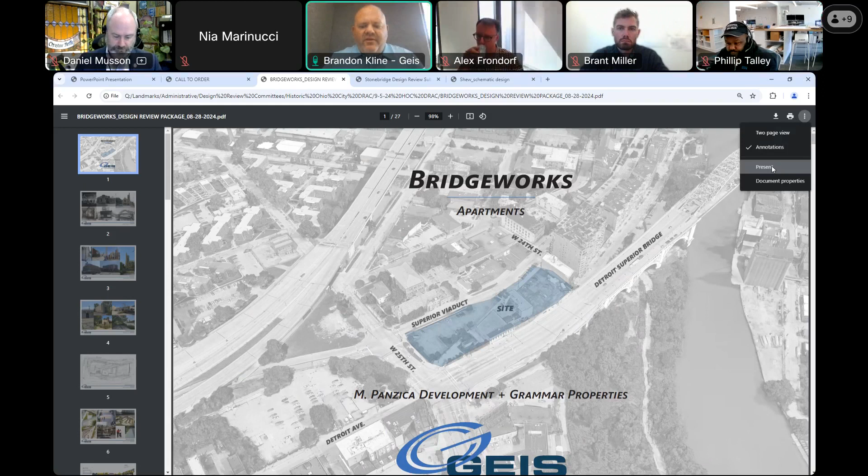Before getting into the presentation, I want to thank the commission for their flexibility last round, allowing us to proceed and get feedback from the Landmarks Commission. The project was well received, with very good comments and feedback, some of which was in line with comments from this commission, allowing us to hone in and make modifications to come back for a final request today. So thank you for that.

The project is located at the corner of Superior Viaduct, West 25th, and the Detroit Superior Bridge.

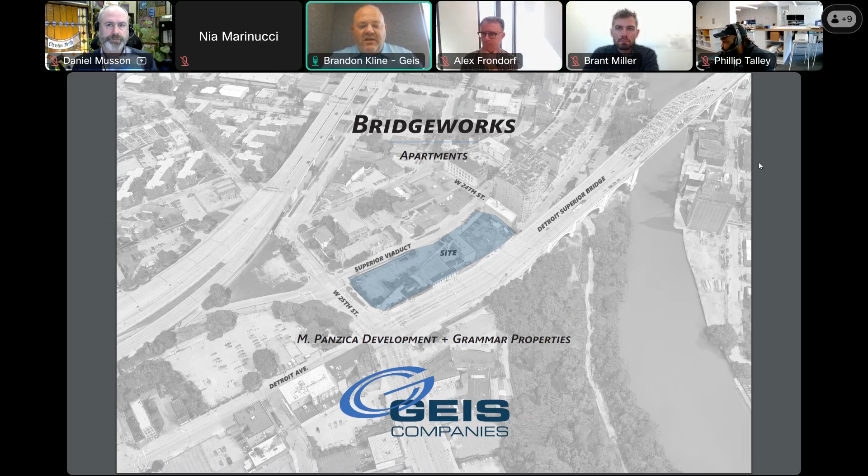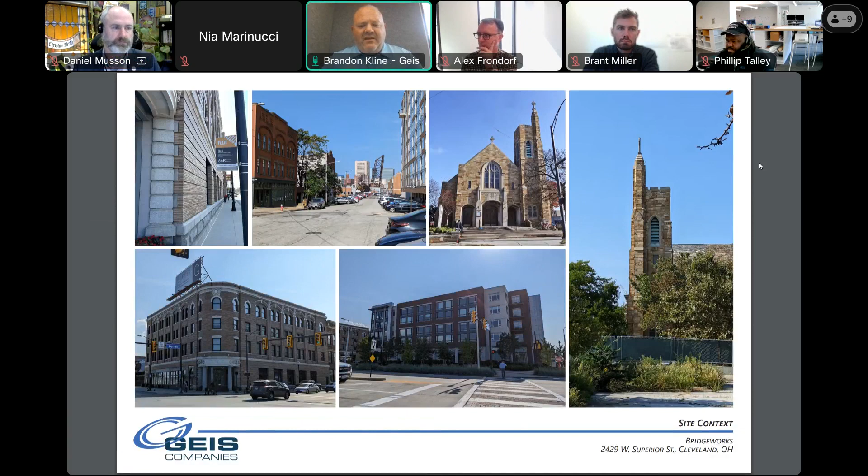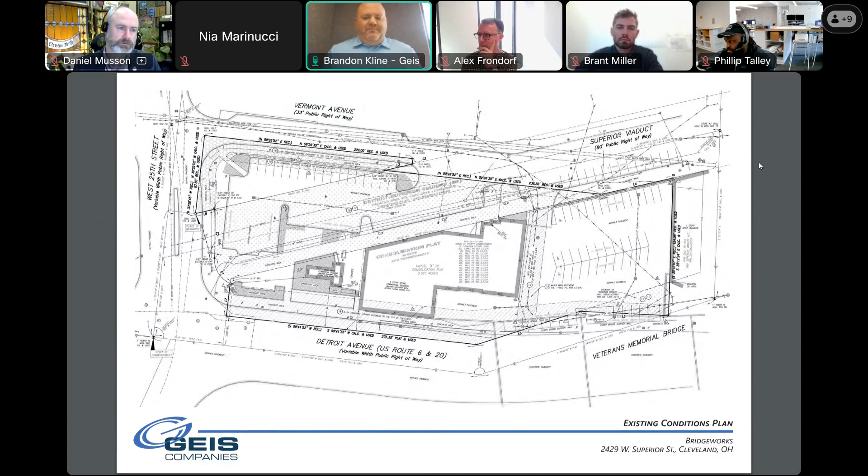From a general site plan perspective, nothing really changed from the last time we presented, other than some refinement which I'll go through in the renderings. We were able to consolidate and limit vehicle access under the bridge, allowing for a more pedestrian-friendly experience on the backside area as it connects to the underbridge into Irishtown Bend Park, when that gets fully done and reconnected, with some updates to the landscape plan.

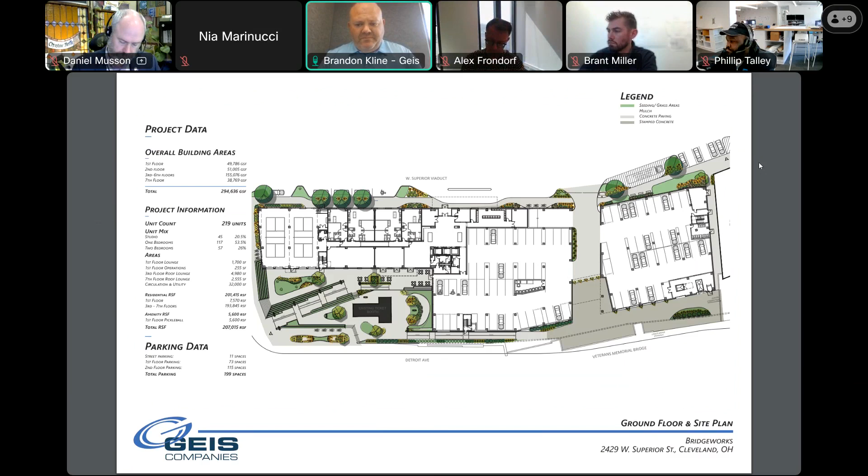This shows general circulation from pedestrian, vehicular, public, and service, to give you an idea of how people access the site and building, and circulate through it. The intention is to allow the pedestrian to cut through that underpass area to access the opportunity for some special seasonal events.

There's been a lot of discussion since the underbridge opening a couple of months ago about the opportunity, given its success, to treat this almost like Dumbo in New York City, where there's a connection under a bridge with seasonal exhibits - whether a farmer's market, retail, small boutique, pop-up event, or sales - repurposing the garage for that while we relocate some parking for the building on a temporary basis to accommodate it.

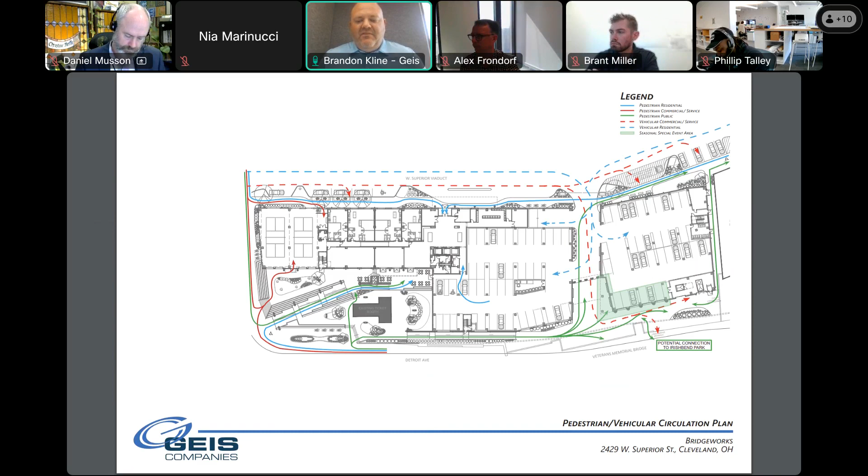For site lighting, the one aspect that changed is we added some linear wall washing at that intersection and connection that slices through the property to the underbridge, to create a warm glow and accentuate the repurposed stone. We'll show you a detail slide of what that looks like shortly.

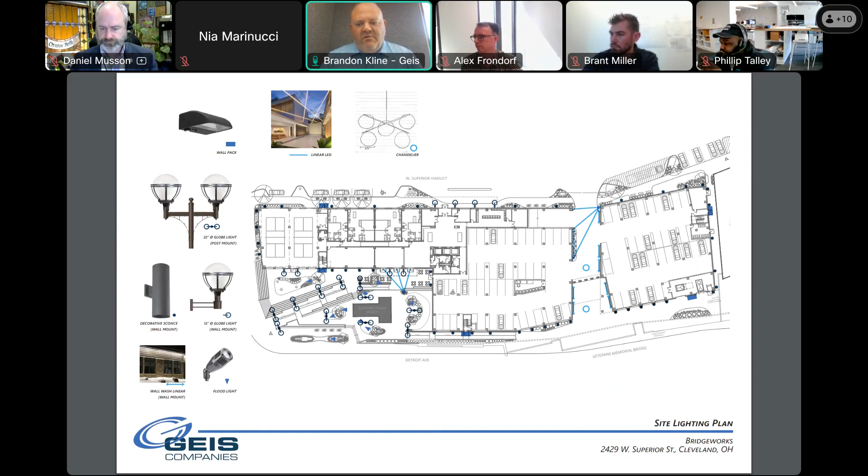It's a 7-story building with 1.5 floors of parking. The rest of the building would be multifamily with some pickleball courts and other amenities, along with a cafe.

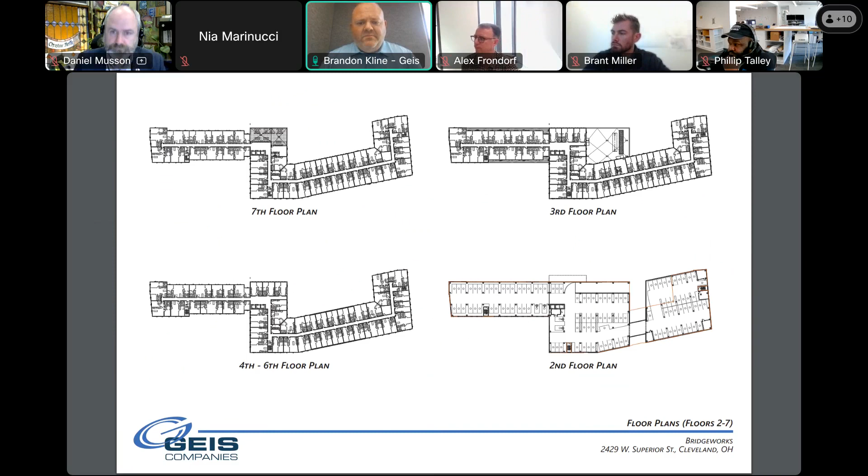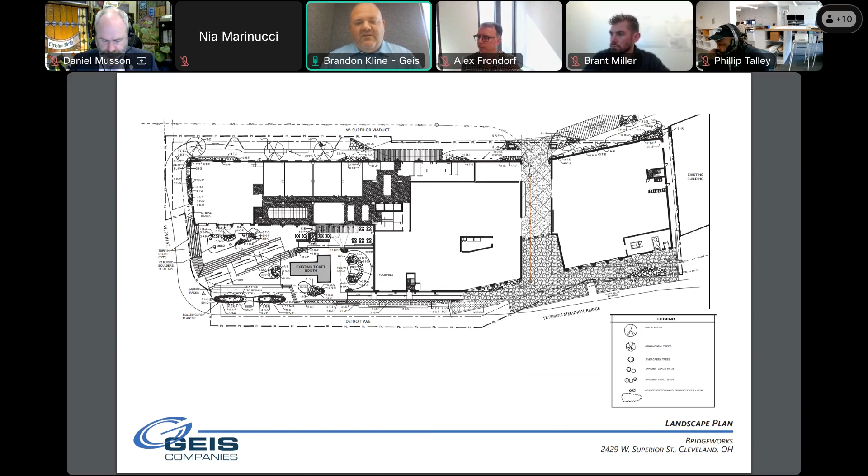Native plantings and low maintenance landscaping.

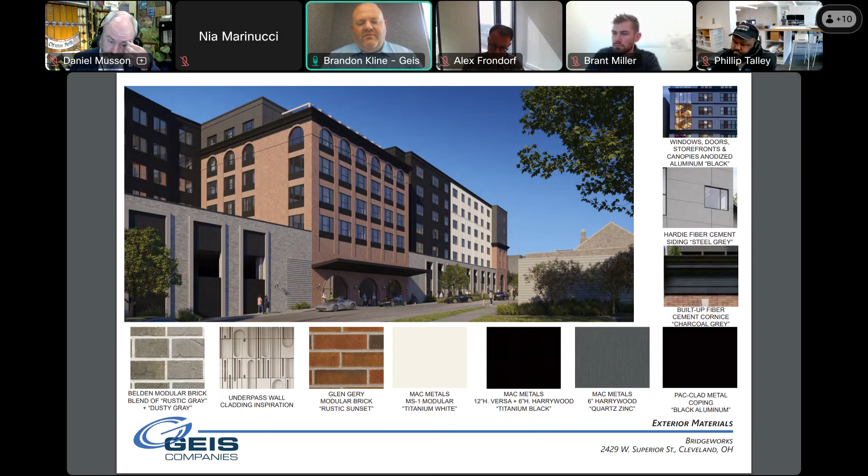The materiality of the project has remained relatively similar. I want to emphasize that the Mac Metals MS1 modular titanium white was presented as a white color, but the real color has a slight cream to it, so it's a slightly off-white white. Outside of that, the materiality of the building remained the same - just the orientation and some detailing has been modified, including increasing some of the brick elements and floor lines.

From an elevation perspective, at the corners of the building we raised the brick floor line and made it consistent at the ends. The idea behind the design is to create a hierarchy of the main mass on the main frontage of the building, connecting through to the backside as a break point - breaking up and varying the facade and massing feel, and creating a tiered approach at the bookends with a lowered cornice height with brick. We also detailed the bookend with a radiused window similar to what was in the middle section that everyone really seemed to like at both commission and landmarks.

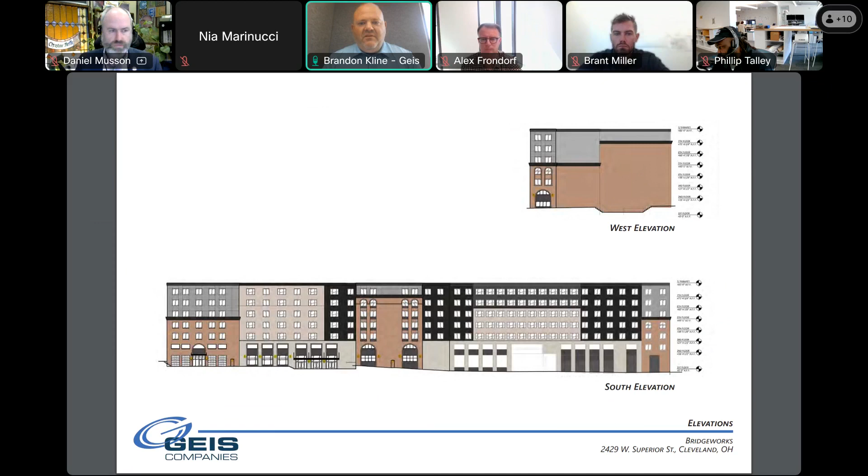This is the plaza side. Aligning on the south elevation would be the bridge section. We also limited the amount of that cream white materiality, and simplified some of the detailing so that it wasn't as broken up and out of place as some of the comments we received at the previous commission.

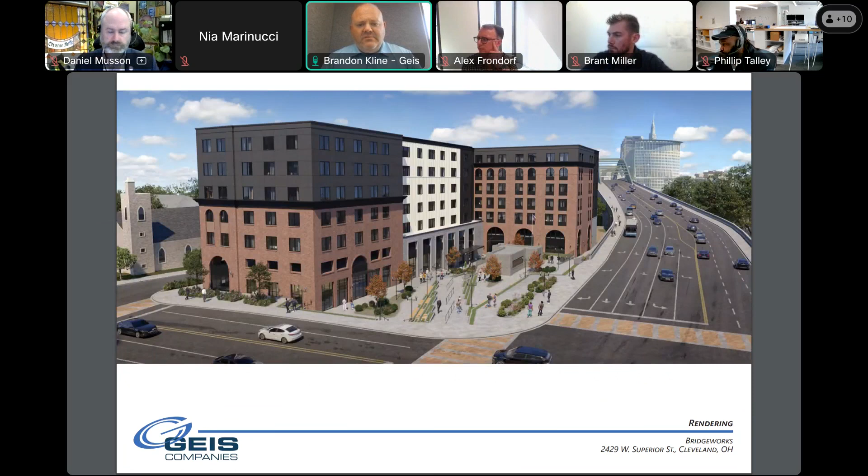Here's a look from Superior Viaduct, kind of an aerial bird's eye view. You can see the roof terrace on the 7th floor of the middle section. We've also added a roof terrace on the 3rd floor of that inset area for outdoor amenity space, more of an active outdoor roof terrace. Again, we limited some of the white to try to break up the building a bit more.

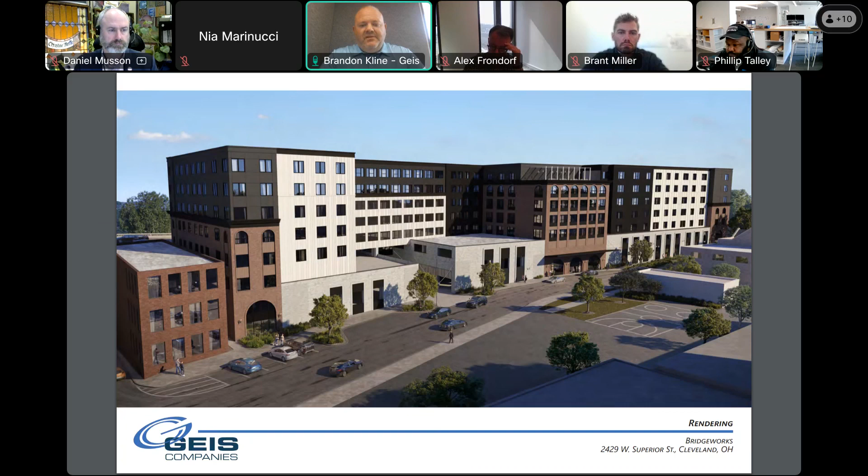A look down Superior Viaduct.

The view back up, looking at the main entrance to the building and up towards St. Malachi and West 25th.

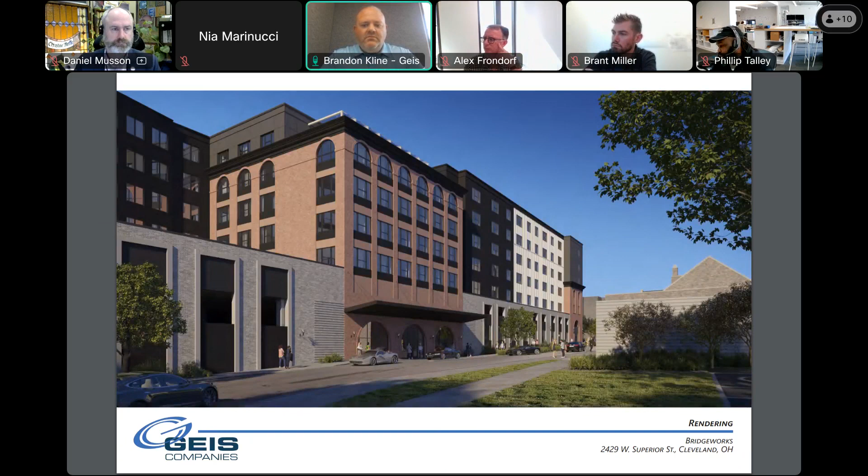A detailed, enlarged view of the patio, as you come down the rampway to the main inset building entrance off of West 25th in that plaza.

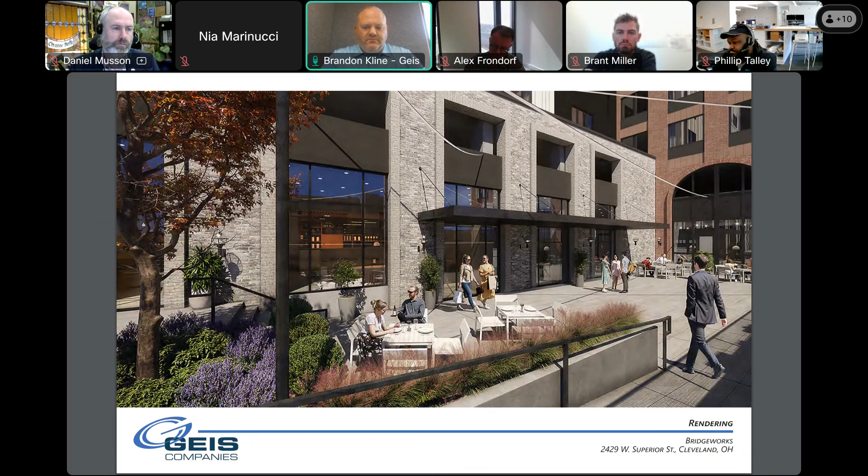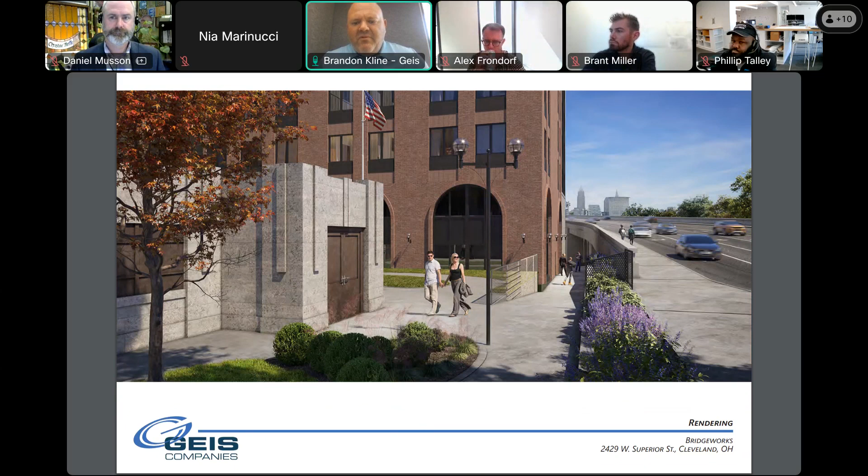A view down just to the right of the ticket booth, as that walkway connects you down to the underpass and underbridge area and connection. You can see some of the archways continuing on down, along with the brickwork and brick detailing that occurs.

Here's a view down from Superior Viaduct looking at the underbridge connection and access point. You can see the detailing of the wall paneling on the left—we're going to flank that paneling with repurposed masonry coming off the existing buildings, details of which you'll see shortly. It will be a nice linear lining of old and new aligning as a pedestrian accesses that walkway.

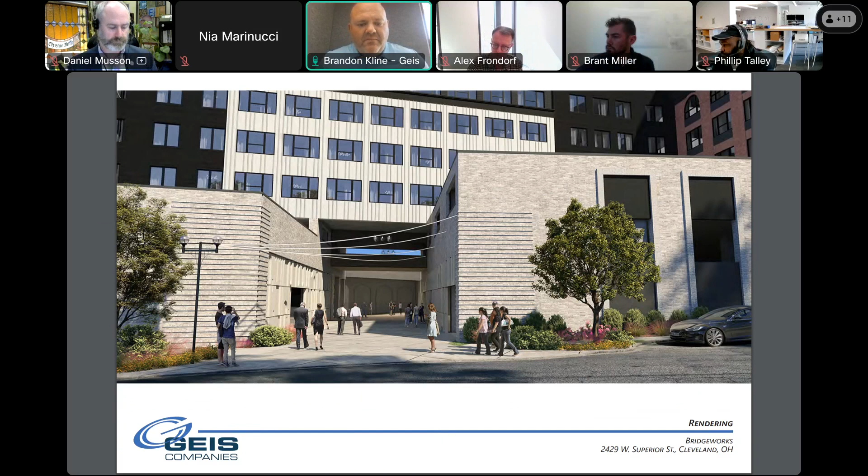Here's a look at what this will look like as a farmer's market or weekend special event opportunity. Right next to the opening of the underbridge, you can see the detailing of those wall panels. They'll have wall-washing light to create a glow, lighting this area and making it an inviting space.

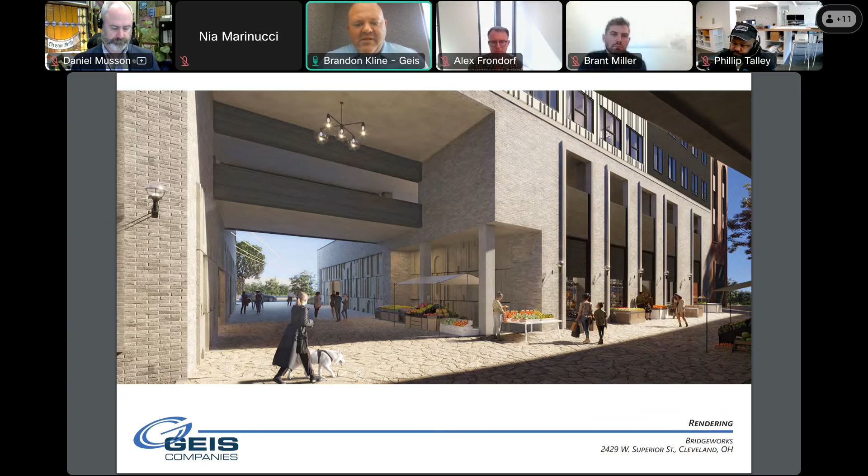Here's the imagery of the stone we'll be repurposing and salvaging when we demo the existing county facility building, then repurposing it into the new building. The next slide shows the location and idea of the repurposing.

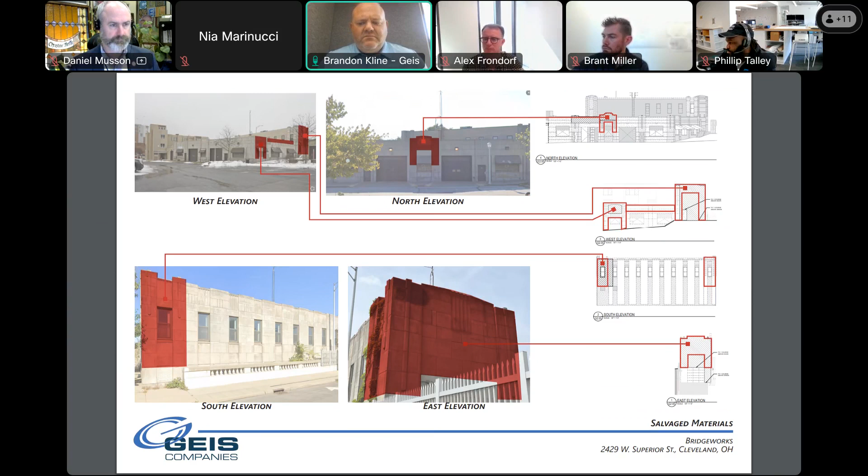We're recreating those Art Deco style piers that occur on the main building, utilizing that architectural wall paneling as a break. One comment we'd like to adjust as we present is to fill the space between the columns and the Art Deco wall paneling more, so it aligns at the same line as the garage entry for more consistency. This was the idea of the salvaged stone and how the GFRC molded Art Deco panels will work together.

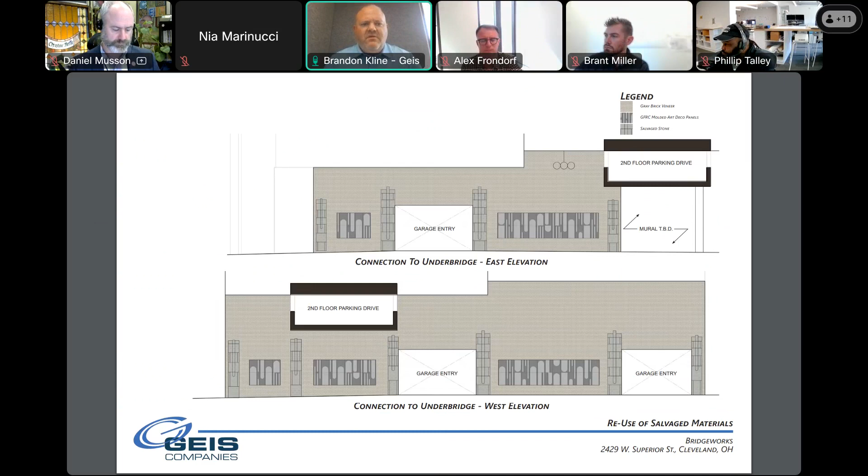Thanks for the presentation. Real quick, Dan, were you ever able to find out any information about the Stonebridge right now? Oh, hey, there we go.

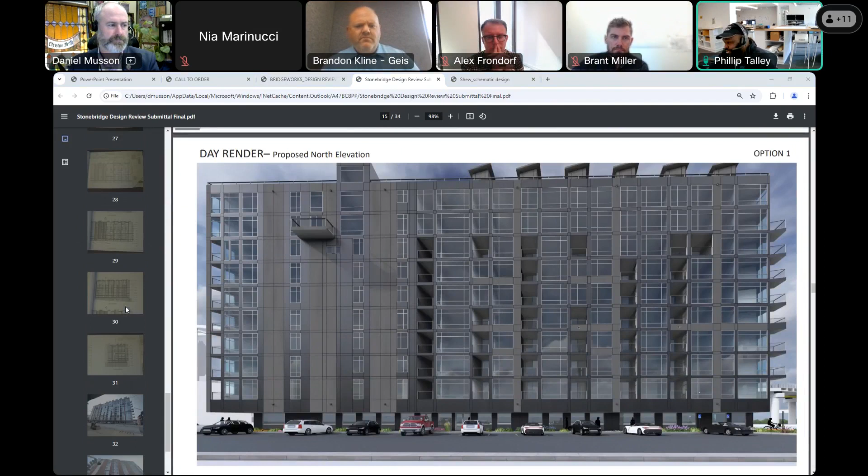Brandon, I don't know if you guys were aware that the Stonebridge right up the street, two buildings over, is being recladded. They're taking off all the brick and doing a metal panel. So this is what it's sitting in relation to. I don't know a ton about the project itself, but this is what your building was kind of up against, minus the little building in between.

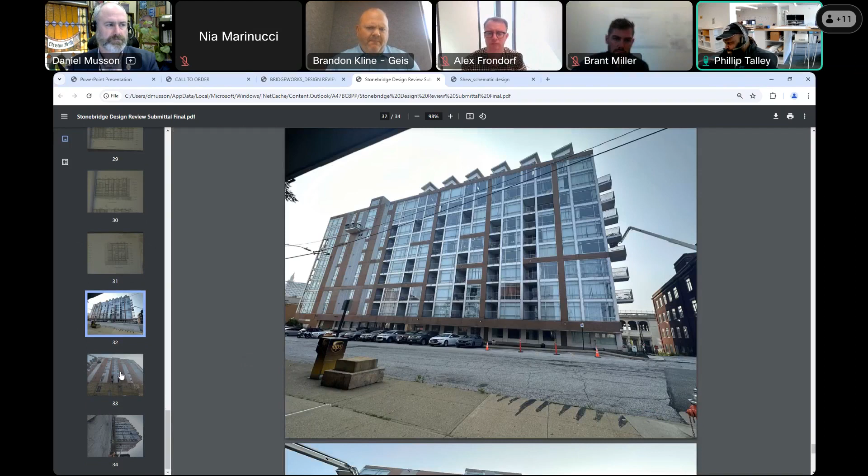Had you seen these renderings, or had you guys seen these renderings? I haven't seen the new ones. I'm very familiar with the existing conditions and the issues and deterioration of that facade.

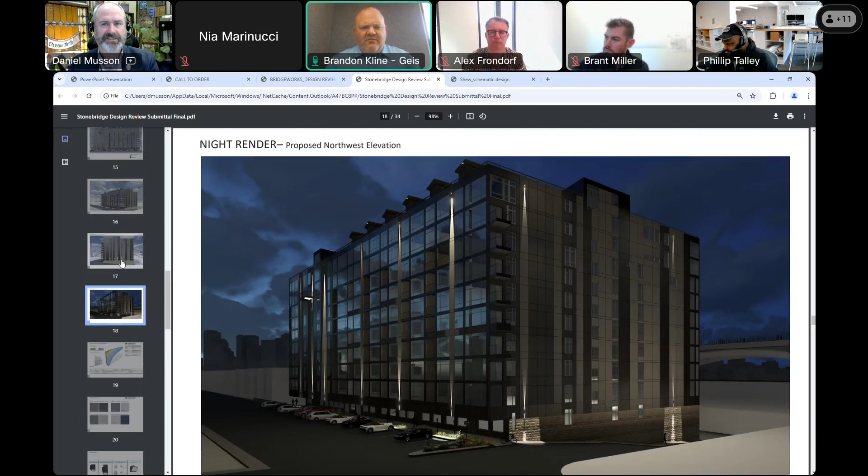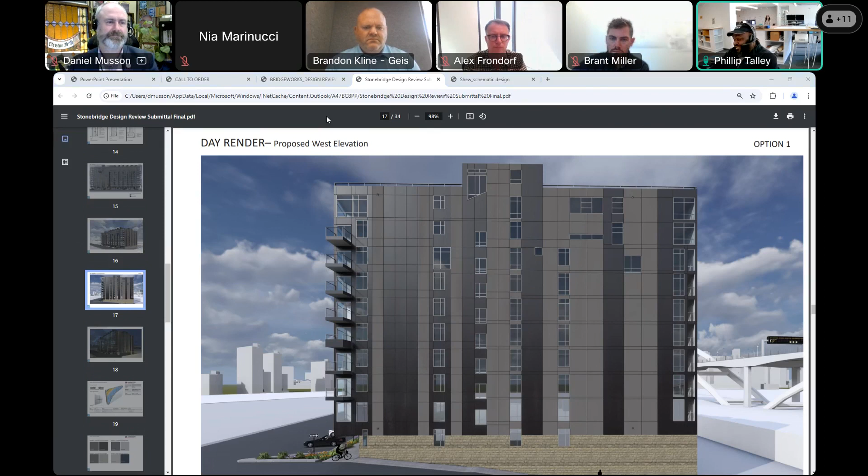Okay, yeah, this is helpful. It's unfortunate that we can't see them in the same rendering, but I do appreciate this, Dan. This was very helpful. It's going to be a dark building.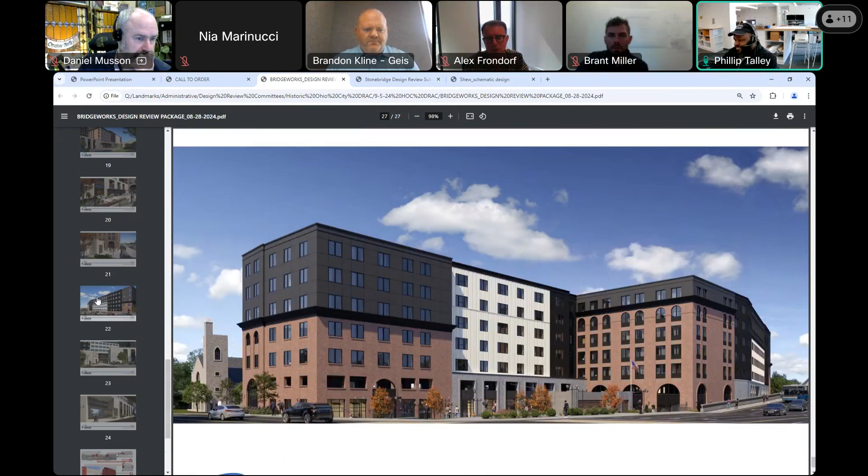So can we go back to the renderings? Yeah, this one, and actually, I think I want to go to the view along Detroit Superior Bridge. Yeah, that guy. Okay, I mean, I guess they are speaking a similar language as far as the use of dark panels.

But yeah, I will open it up to the committee first, though. If anyone has any questions or if you want to get anything out there, I will allow the committee to go first. Phil, could we ask Dan

to receive the feedback that Landmarks provided? Oh, yes, Landmarks feedback. Yes, so generally, Mr. Kline mentioned they were, I'd say overall, generally supportive.

There's some recommendations that the applicant look to consider the dark and light composition, architectural expression, and urban design, the scaling of the openings at pedestrian level, and the uses to activate the spaces. There was some comments that the southern elevation could have more depth or interest with materials, colors, contrasts, and articulation.

So that's the elevation that's up now. Also, additional suggestions of articulation along the Detroit Superior edge to make it more like the north elevation or the Superior Viaduct side.

I did share the Design Review Advisory Committee comments with them, of which, generally the commission was agreeable to, and again, reiterated the kind of studying the articulation of the south elevation.

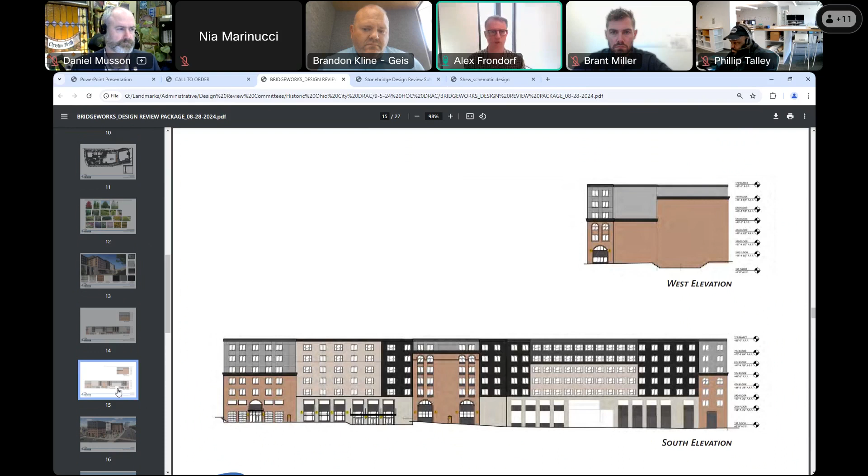No. That one there. I just want to make sure I understand what I'm looking at there. That west elevation, that large expanse of brick. I didn't see a 3D rendering of that, so I want to make sure I understand what it is that that is facing. Is that facing the adjacent building?

Yeah, you're not going to see this. There's a 3-story building flanking it and blocking it out. There is a rendering that you kind of look at that view, and again, you barely see that facade because of the adjacent buildings that block it.

Okay, understood. That was my assumption. I just want to verify.

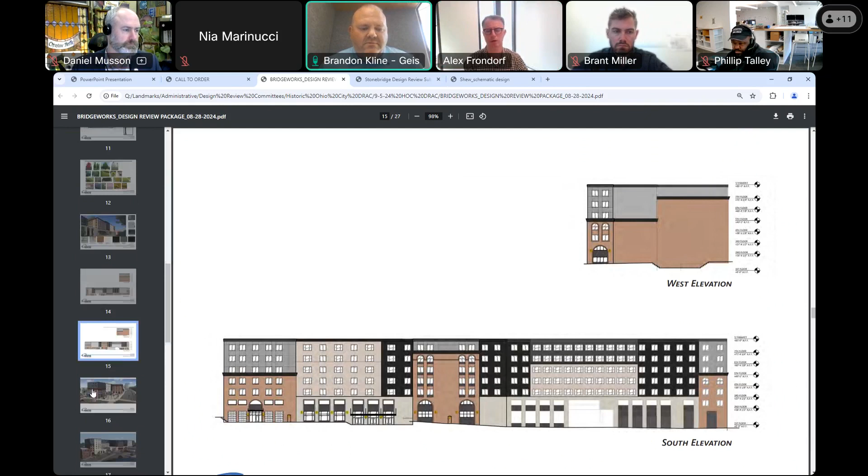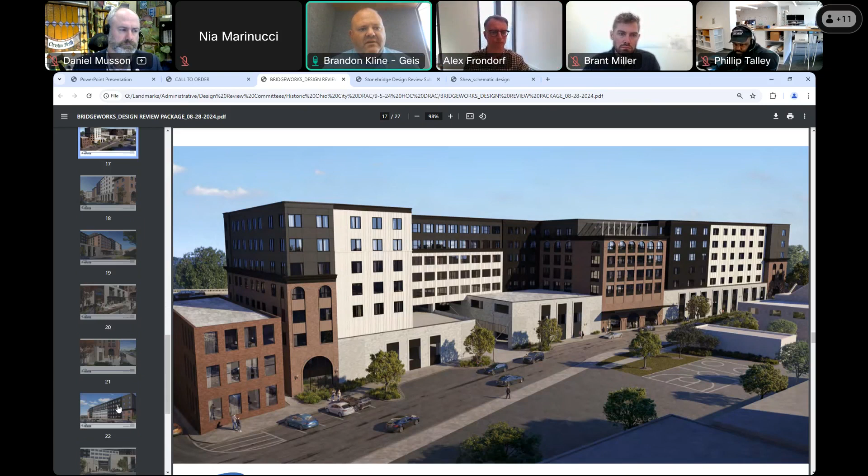Yep. But no, those are my distilled down, pared down comments, are largely reflective of Landmarks. The south elevation isn't where it needs to be in terms of materiality and design, and the corners need to be held with brick going all the way up to the top or near the top. So to clarify from Landmarks comments to us was to kind of simplify the changes in materiality along that south facade. We used to have a different type of architecture that was spanning kind of in the white section of that building. And they felt that it took away from the detailing at the corners and at that midsection. So this is the response to that.

We did raise the brick at the bookends an additional story. The intention there really is to keep the emphasis at the midsection, the mass in the midsection that kind of cuts through the building, at that upper floor. And so that's really was the intent.

And I understand that, and I appreciate the efforts. It's still the large expanse of paneling, and I'm sorry to use the comparison that I used last time, but it reads like a Residence Inn off the highway, a more elevated one for sure, but it's the large expanse of that panel material along the bridge there that is the primary view shed for the park as well.

No, I have nothing further. Anyone else? Go ahead.

Really just want to reiterate most of Alex's comments. I actually did watch the landmarks meeting, and I do think there's a lot of consistency with regards to materiality and how you're addressing the kind of calling bookends now of the building. One of the comments in landmarks was that with the white, or as you've said, like the cream color, that with the two dark grays, it feels very high contrast, and not necessarily in a good way.

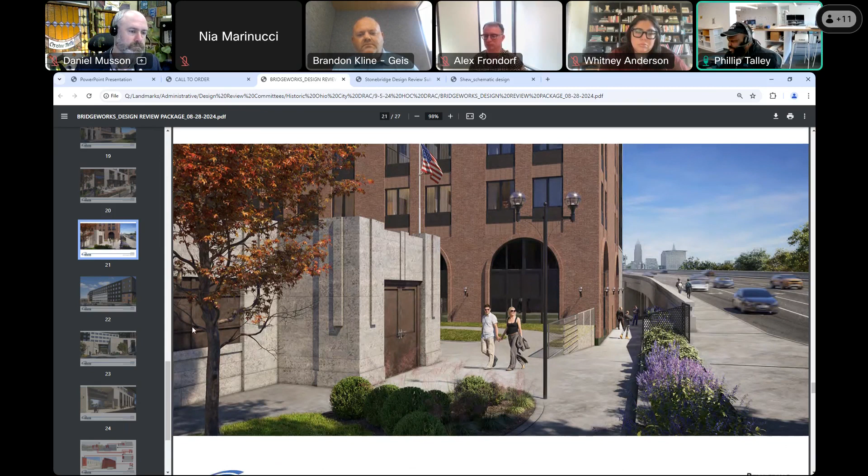I think there are some elements in this building that work though, and I really have to mention this. Can we go to the Art Deco alley view? I think that's a wonderful concept and a great idea, let's stick on this one. I love that textured brick, I love the detailing. I thought that was amazing on this project, and I thought it was amazing on the last version of this project too.

You're showing bollards here in plan, but you're not showing them in the views, and I would be curious to- Those aren't bollards, those are planters that'll be vertical. They'll be movable. There's a CPP transformer at that underbridge that needs to be accessible, so there'll be vertical planters that aren't rendered in this, but they would act as a vehicular deterrent for 95% of the time.

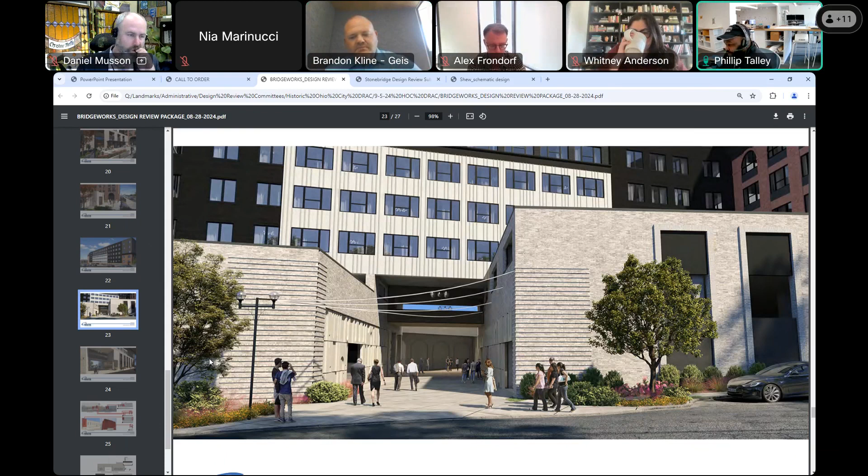I think if we saw this rendering again, maybe not this one, maybe the next page, we would see the planters at least, and then maybe there's another one where a car is interacting with this. That's not very important because I'm kind of sold on this part, although hearing Whitney's comments on the farmer's market, I see the struggle. That path that's going in, it definitely does seem like something.

Let me put this- I think adding the lighting to that side has kind of improved the feeling going down that path. It does seem a bit narrow, and it doesn't feel like it's the safest or most welcoming place. I don't want to repeat everything people said about the materials, but I think it needs relief along that bridge to create something that says this is Cleveland, and I don't think that's happening right now.

I also kind of really like the language. I like this modern language, and I like the language that you create with the red brick and the arches. I think those are both pretty powerful.

Hopefully you can incorporate that with kind of that relief along the Detroit Superior Bridge.

Are all of these materials metal panel? I'm seeing the white, that's the MAC metals. Is the black and the charcoal metal too? Are all these metal panels? The medium gray is not.

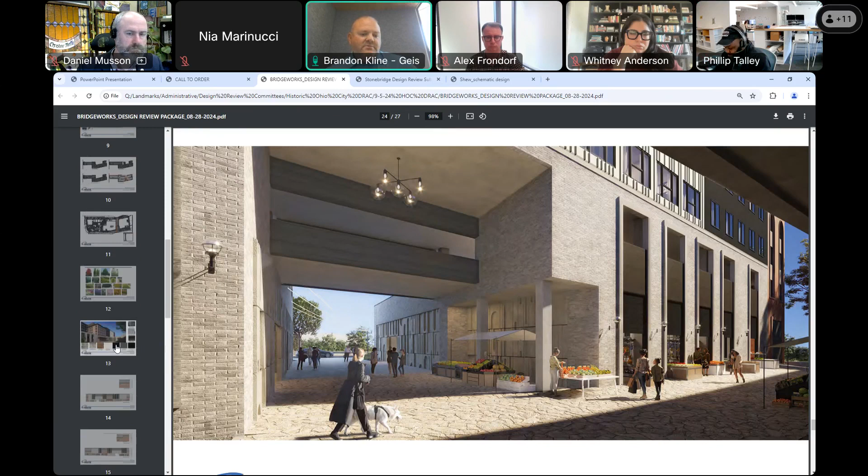Okay, I guess it did seem like it had a kind of trim pattern going on with it. Yeah, I think that's all I want to say. I think, like I said, the path below is a great concept. I think it works, it's just there are some dead spots with the rest of the design.

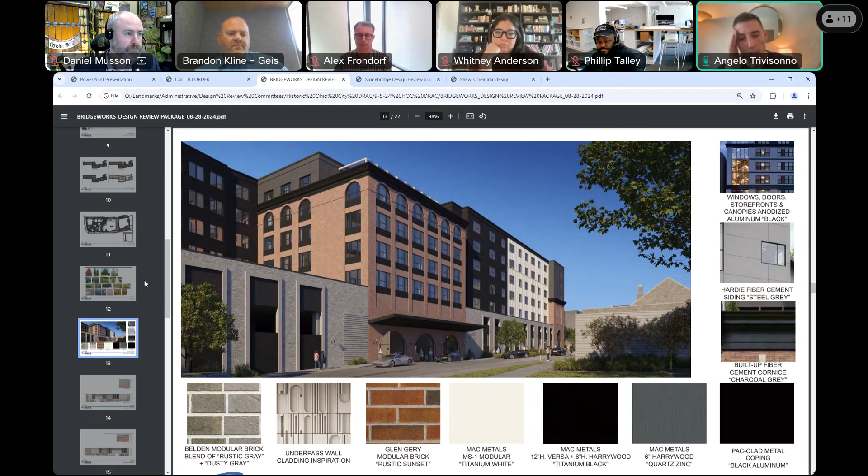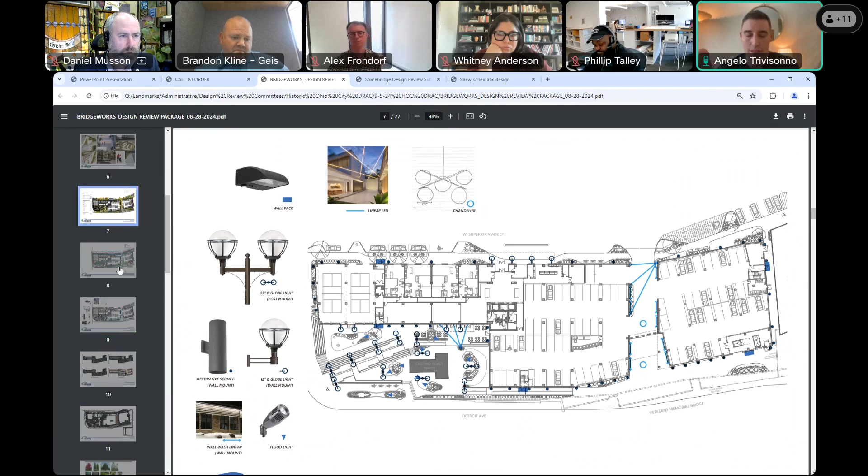Anybody else? I had a question about the ingress and egress. If we can go back to either the plan view or alternatively any of the renderings that show that entrance. My understanding is that not too much has changed in the layout, it's been mostly cladding. I know a comment from our previous meeting was concern about egress and how these particular parking areas are structured to come off of this leg coming off the street here. Can the applicant walk us through their expectations on how pedestrians, people using wheelchairs, people generally accessing this are supposed to share this space with the cars moving in and out?

Yeah, if you can go to slide 16, I guess it is. It's actually a circulation plan that shows some of the motion.

So this, when you say the shared access, you're talking about the vertical access way that connects to the underbridge? Is that the intention and thought process back here? Under this would be treating it almost like a woonerf, like a European street that shares cars, parking, bikes, and lets people cross through. The intention is this would be a very low flow garage from a vehicular perspective. Apartment buildings are actually one of the easiest vehicular circulation aspects because people enter and leave at different times during the day. So the intention would be that this is a slow moving vehicular access point, and really emphasize that the materiality would feel more of that European street kind of feel that shares, and what you see in that access point is to be able to cut through.

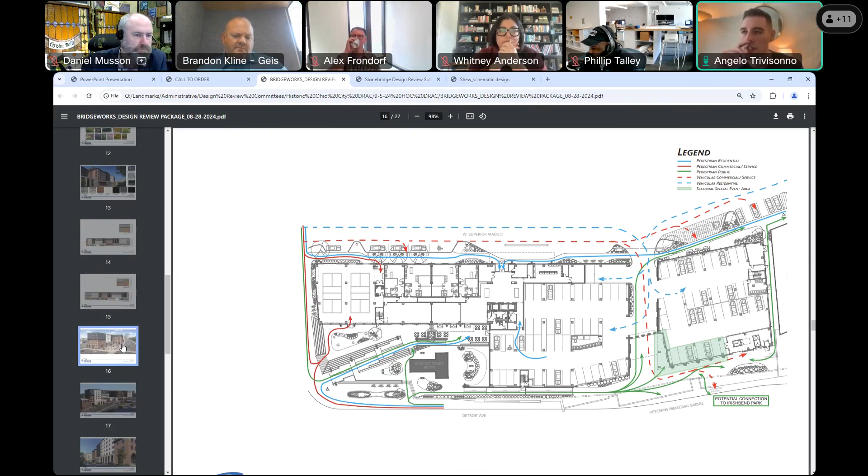Great, my last question was kind of a minor detail, but I'm curious to know your thoughts on this. There's a walkway that comes in from the southwest corner toward the center, near the cafe seating. Can we jump to a rendering of that? There's what I suspect is some sort of handrail, staggered in three segments, and I'm wondering if there's a particular reason you chose to stagger it rather than make them parallel with each other. I'm trying to imagine myself or others moving through this space and having to constantly make left turns to each little segment. Do you have any insight on why that's like that, instead of a smoother straight shot?

Can you go to the plan?

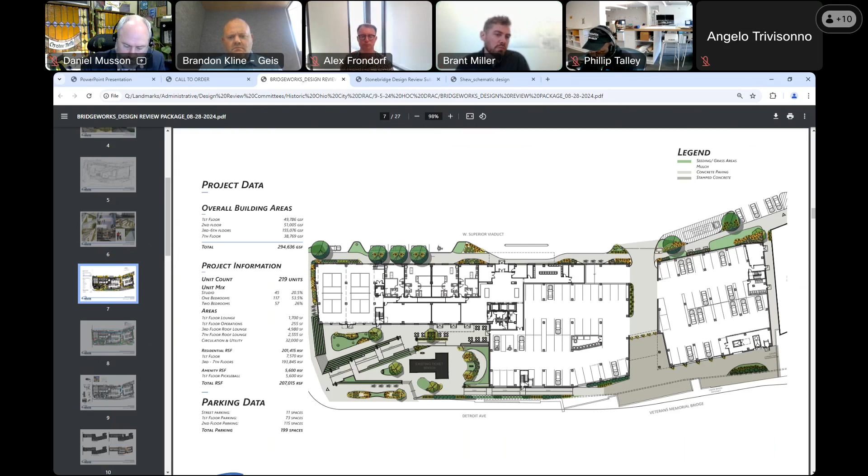I'll jump in, starting with what I think works pretty well. I think where the plaza is positioned, in relief at the end of the bridge, is kind of nice there. At the pedestrian scale around the building and through the underpass, especially the detailing, is nice. My concern maybe echoes what Alex mentioned at the beginning -- it's really the south facade, that rendering on the bridge, and the lack of depth there. I think if you can go to that rendering towards the end.

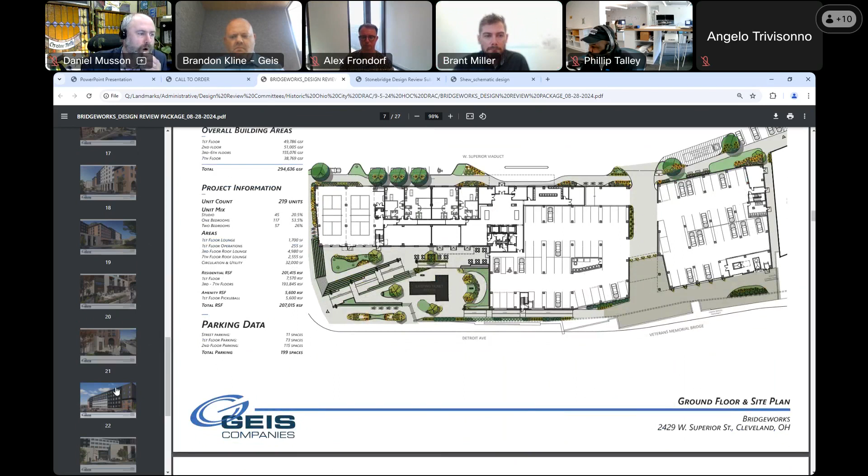Yes. So it's really the transitioning from one material to another, having everything in the same plane, that's getting me. When we're talking about depth, it's not necessarily the articulation of the windows or the detail in each element, but how those are pulled apart from each other, so it doesn't feel like one flat plane across the facade. My last comment is, coming from the Cleveland downtown, having that area brick carried up two levels would be helpful, so it feels like that middle section, which feels pretty good. I'll leave it at that.

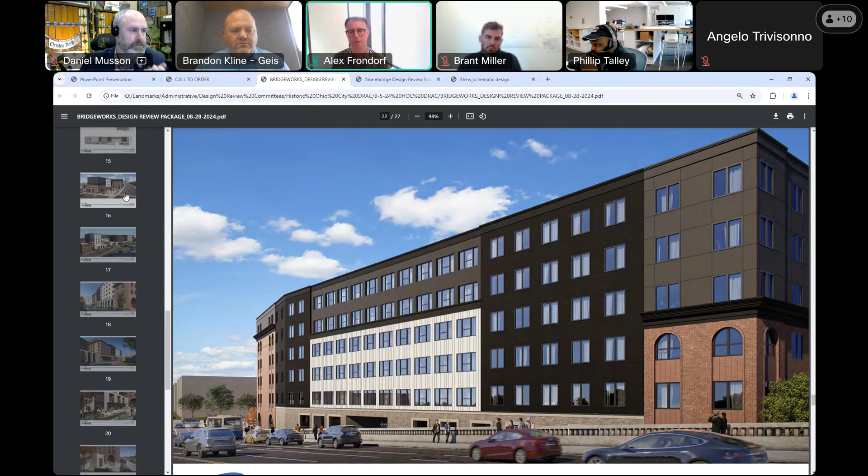But at the West 25th Street elevation along the park, you will see this. And as Phillip perfectly put it, Cleveland deserves an iconic building here. Cleveland deserves something a little bit more elevated, and better is possible. That's why this committee exists.

Would you like me to make the motion then? Go ahead and table it. All right, then I will move to table this per the applicant's request. Have a second? Second. Dan, could you call roll?

Sure thing. Ms. Anderson, yes. Ms. Flaherty, yes. Mr. Frondorf, yes. Mr. Miller, yes. Mr. Trivisonno, yes. Mr. Talley, yes. Mr. Chairman, the motion to table passes unanimously.

So yeah, Brandon, you guys can make those revisions. If you want to talk or discuss with staff at all, we're happy to meet and have conversations if that's helpful, understanding the comments that have come from this committee and from the Landmarks Commission further. But yeah, I guess we'll wait when you guys have some revisions.

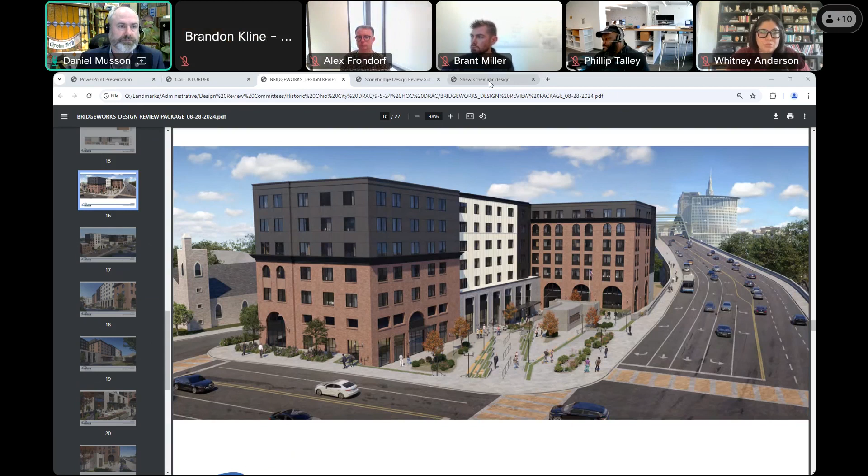Next up, we have a schematic review: case HOC 24-26, 4208 Clinton Avenue, the Ohio City Historic District, new construction for the Shoe residence. Again, this is schematic only, so no votes taken, no motion, just some feedback for our very own Neo Marinucci.

Hello everybody. My clients, Zach and Chelsea Shoe, are on this call, so you guys can chime in on anything if you'd like to. We are presenting a new construction single-family residence at 4208 Clinton Avenue. Next slide.

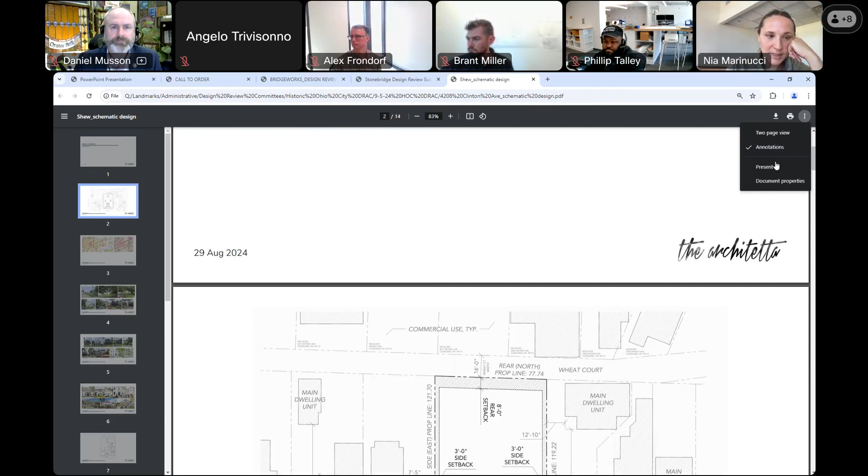Here is the existing site, an empty lot. This is really showing our assessment of the buildable area per zoning. Next slide.

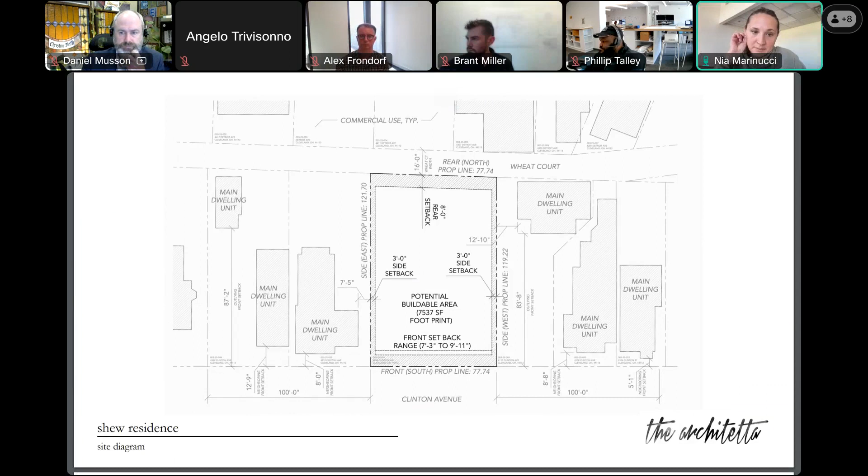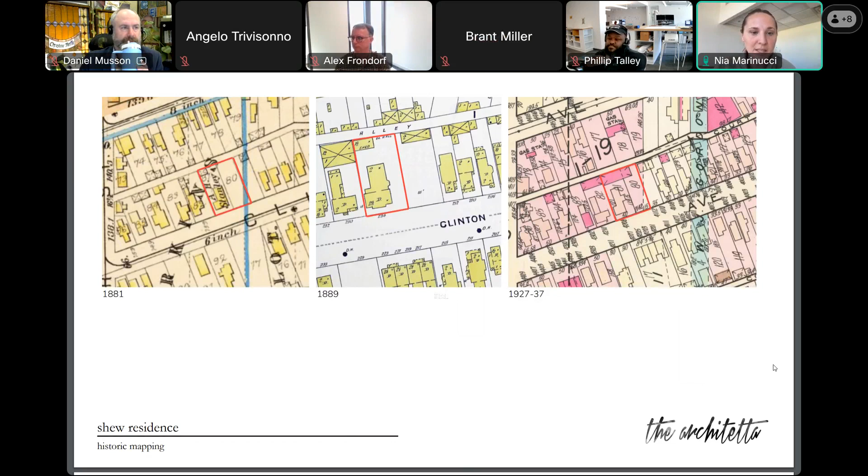Here is a little bit of the historic mapping. It looks like there was a structure, a home on the property at some point, but it hasn't been there for at least the past decade plus, I think several decades. Next slide. I think it burnt down, I think it was in the late 80s.

Oh, there it is. Okay, so on the top row of images, you can see the site itself is just a grass field. It was owned by the manufacturing company behind it that faces Detroit, prior to the Shews taking ownership. The bottom row shows the immediate neighbors to the west—a white, what used to be an Italianate vinyl structure—and to the east, a folk Victorian. If you look closely at that photo, there's actually a rear yellow colonial on the back half of that lot.

To the south, there are renovated row homes, and we also have new construction development with a few single-family homes to the south across the street. Next slide.

Broader neighborhood context, I have a bunch of examples, the majority of which were newer constructions along Clinton Avenue, with an influx of newer builds over the last 10 years. There are a couple renovations in here as well, and I also included two Greek Revival examples elsewhere in the historic district, which you'll see we're evoking in the new construction plans.

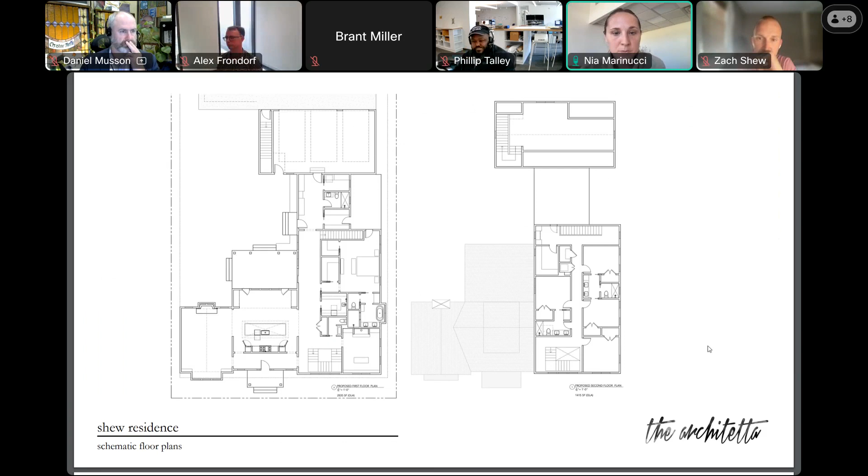The other intention behind the massing in this way was that because the site is wider, I really did want to work in two front-facing gables in some capacity, to make it feel like it was fitting the rhythm of our most prevalent front-facing gable context of the broader neighborhood, which seems to transcend the different historic styles we have present in the district.

We also opted for one of the elements I think makes it distinct as a new construction: integrating a larger, more modern window alongside the more traditional 6/6 double hung. That's the balance we have struck, what we hope to have struck, in this massing and rhythm of the new facade.

On the east side, the side view, you're getting the broader face of that two-story element, and I think it does hail back to that more colonial type feel. You'll see this front half of that massing from the street front, given that the neighboring property has the house tucked back. So we have a little relief in the massing so that the front half of that double height massing would be pretty visible. I wanted to make sure that was clearly expressed.

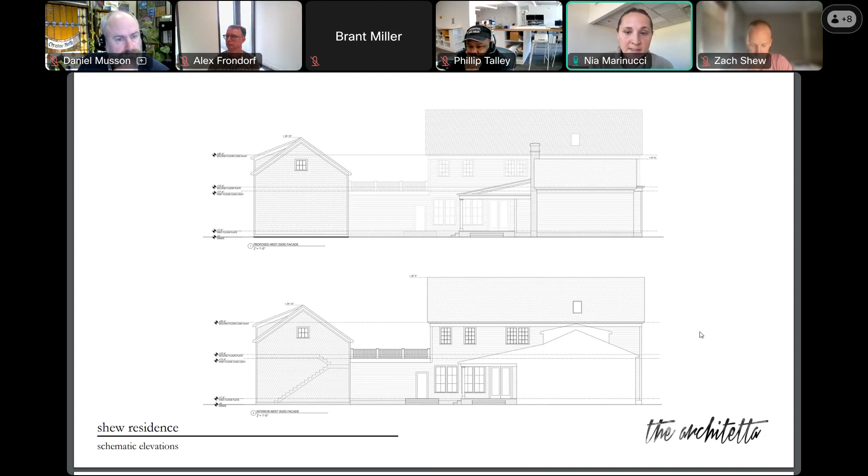Materiality wise, we have two different color schemes, but they're related. The clients are hoping for a darker structure. We're planning for James Hardie board, smooth lap siding, Marvin aluminum clad wood windows, and a dimensional shingle for the roof. They would love gas lanterns, specifically on the front and maybe elsewhere if budget allows. We're trying to evoke that colonial Greek revival, almost New England type feel, which I think is a lot more common with deeper tones and more monochromatic type tones in that region.

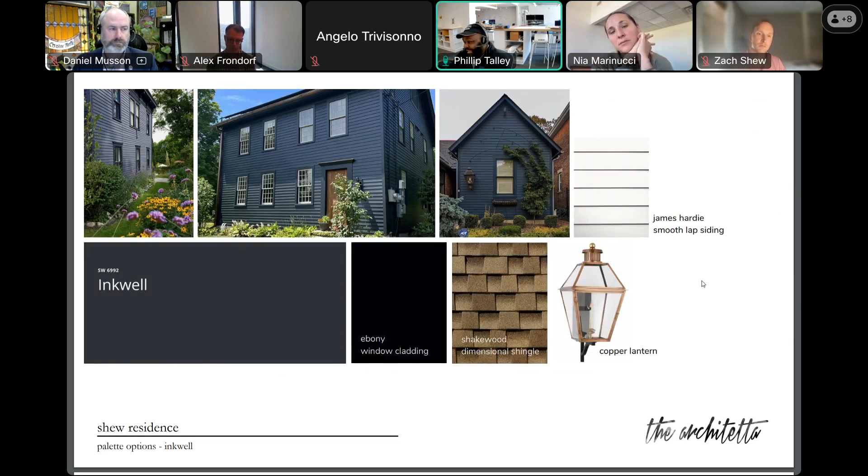I love it a little bit less, but I like actually both color schemes. I appreciate the dark approach. I don't mind the idea of maybe a different dark trim to go along with that. I don't know if everything needs to be the same shade, but I think the whole thing looks good. It's a really nice house. I hope it happens for you guys.

Thanks, Phil. Anybody else? I'd like to echo Phil's comments. Chelsea and Zach, I live on Clinton Avenue, looking forward to being your neighbor. I think this is going to be a great addition.

The lot you're building on is the original size, and it was divided up in the Victorian period. I'm glad that you're putting a home to occupy the lot back there. It looks great. I just have a couple comments.

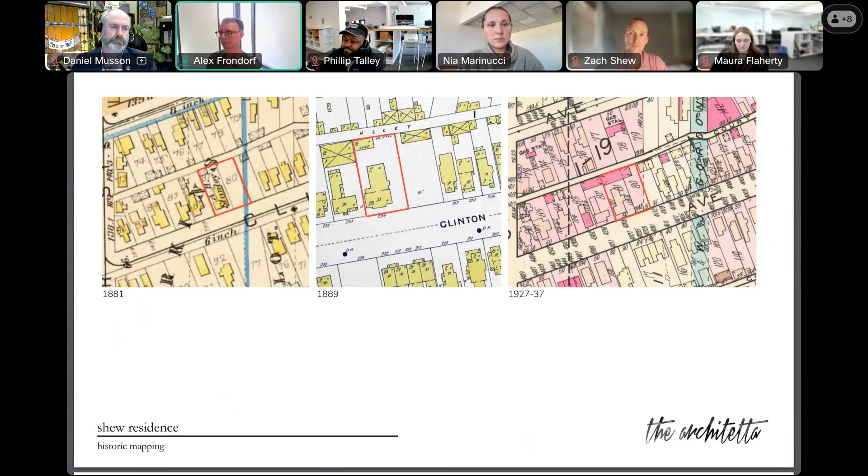One was I agree with Phil's comment about the porch. Some of the inspiration photos that Nia put on the screen, but not all, have porches. I have a large porch on Clinton Avenue, and it's great for building community, meeting your neighbors. I find that during the summer, I live out there a good part of the year.

So if there's a way to integrate a porch, great. I'll leave that to the both of you. But I do think that it would match a lot of the homes that you see there on the screen, and is a great way of building community, and would be consistent with the Greek Revival period as well.

One question, Nia, on the windows: are the muntins proposed to be external? Yes. Okay, SDLs. Thank you. I'll be a stickler with them on that.

And then my last substantive comment, if we go to the south elevation, the front elevation, the eastern portion there, the two-story version, it just seems a little busy to me. There's 4 different window types there. And I know you're not sticking closely to the Greek Revival, and it's a modern house, a new house, and that's fine. But simplifying that version, and maybe not having the 2-story - I know there's a stairwell there.

I understand that, but maybe breaking that up in some way, making it more reflective of the Greek Revival style. And if you're looking for a porch, maybe a porch roof there would help break that up if you wanted to keep the double-story windows.

Just some thoughts. And then finally, just around back, because you're on Wheat Court there, to consider adding a fence to the plans. That's all. I think the materials are wonderful. I don't have an opinion on the color, and it's just the front elevation there. So thank you.

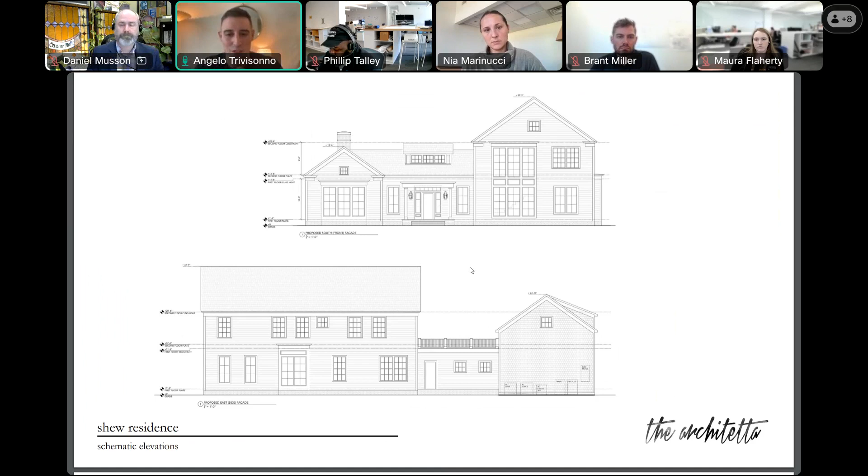I think it's really cool too. On one of the other elevations, it looked like there was a chimney, like a masonry chimney built. I don't know which elevation that was, but that seems like it's going to be a really fun detail—yeah, right there in the bottom right. Yeah, that's all. Nia knows the game and kind of what fits in the neighborhood, so I think it's great for schematic.

Thanks, Angelo. I have a very quick question.

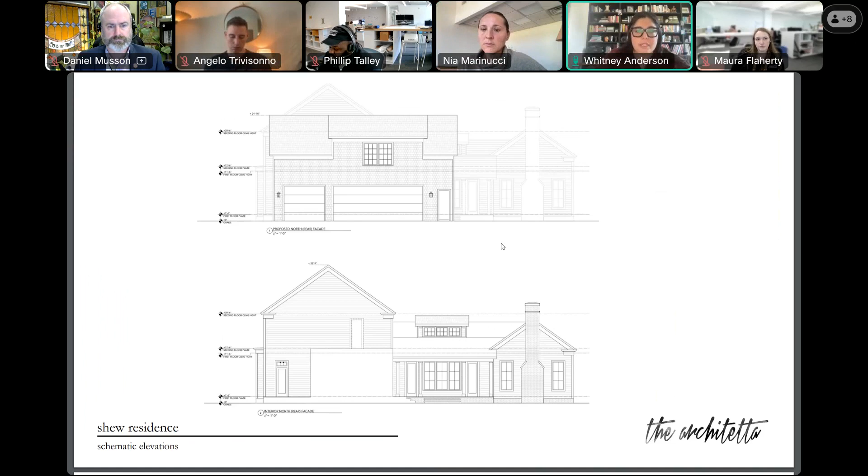First, I think it's lovely, really no notes from me, but with there being such a large first floor, is there a first floor bedroom in the house? There is. I just ask because that's very rare in this neighborhood, it's very hard to find. So when you build new construction, it's nice to add that option for people to age in place, or people with disabilities. I've known both who have had hard times finding housing here with the ability to have a first floor bedroom.

So I really like that aspect of it, and I know that speaks to the interior, not the exterior, but—actually, our current house on 49th, we modified it and it has a first floor master, and that was really important to us for this house as well. I think that's needed in this neighborhood, so I appreciate that. And now, someone else, as you sell, someone else who needs that first floor bedroom will have the opportunity to have it. So thank you.

Thanks, Whitney. Is that everyone today? No, Maura?

Nothing additional from what's already been said. I think it looks great. I do agree with the comments about the porch—it would be nice to incorporate some sort of element like that to engage with the community. And the color, I like both of them, but if there is the blue tone across the street, part of what makes the neighborhood special is having that variety. So choosing something different from what's across the street could be nice.

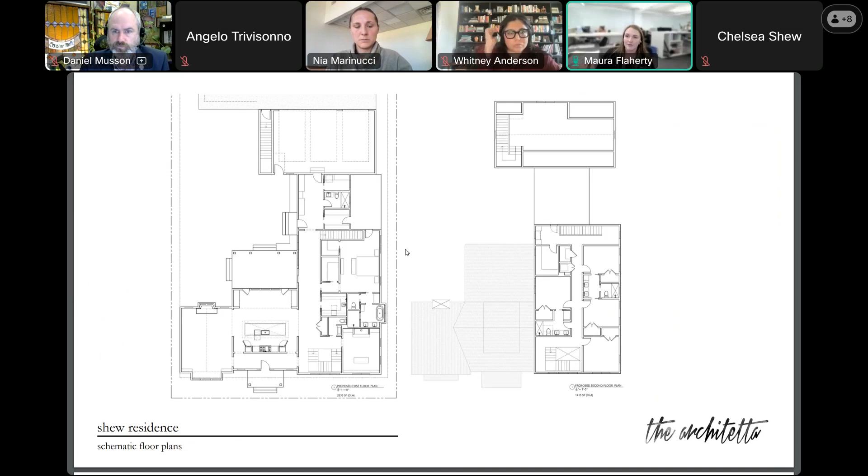Well, thank you all. We are getting the first round of the DD cost analysis done, so hopefully everything will be in alignment and we will be coming back for final before the end of the year with any changes based on cost, but we're really hoping that it's substantially similar to what we have here.

Yeah, thank you, thanks for the feedback. I'll say that Chelsea had mentioned we had redone a house on 49th—it was, I think, the original single family home on the farm north of Detroit, and at some point in the 70s, I believe, it had been converted to 4 units. We did a complete rehab 7 years ago and brought it back to the original single family home. So it was important for us, when we saw this lot go for sale and had interest in it, to make it a single family home and not split the lot in two, or try to parcel it out into multiple, like many have done in and around this area. So it was very important for us to incorporate single family home into the project and make it such.

You're doing a service to the neighborhood. Thank you.

All right, do I need to close out the meeting, Dan, or is it Phil? Yeah, I guess you're out of recusal jail now. Really? Okay, do we have any other—what is the phrasing? Any other notes or administrative reports? I don't have any. Do you have a chair's report? I don't have anything else for us today.